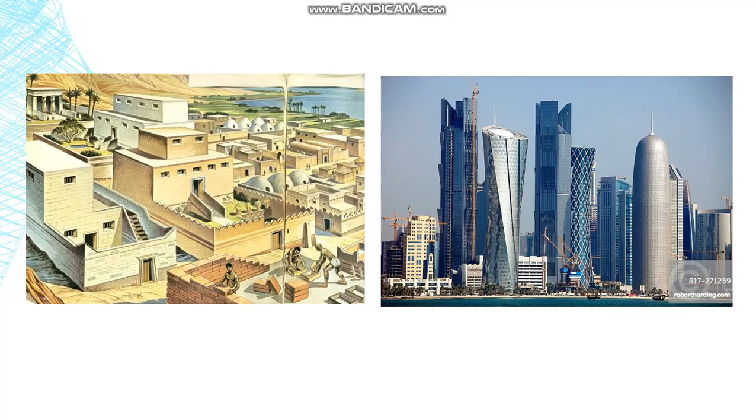Well, I would like to start by introducing how people used to build their structures in the past. They used to consist of 1 to 3 floors, but now we are building much larger and taller buildings that are capable of withstanding more people, more loads, and so on. All of that happened because of this amazing material, which is concrete. Well, you may ask, what's concrete? Well, it's an ancient material that's basically made up of aggregate bonded by cement.

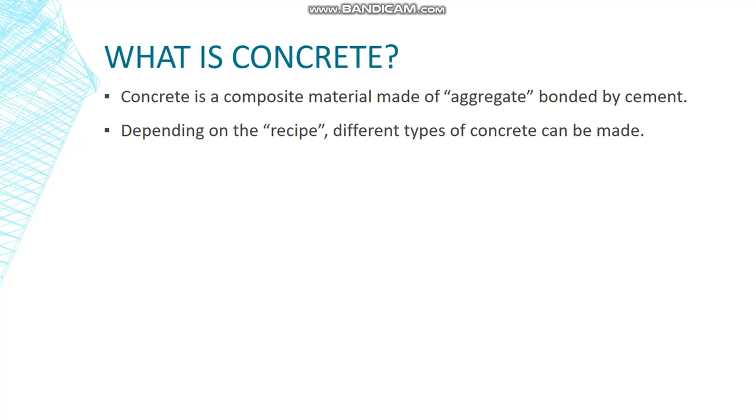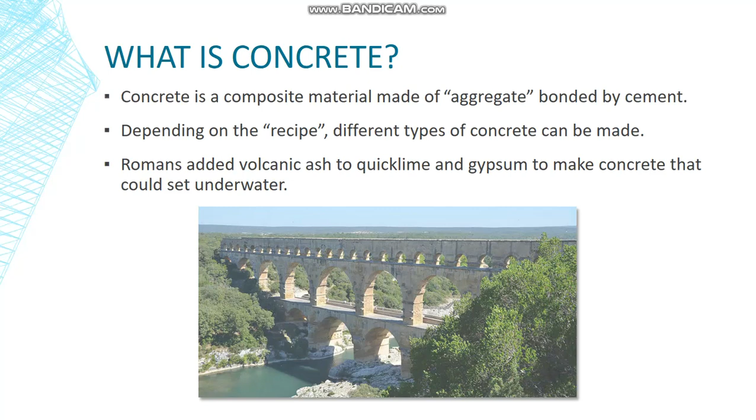And since changing the recipe will change the properties, we can work on this field to improve our concrete for our applications. For example, the Romans used volcanic ash to add some more waterproof properties to the concrete for building bridges, water transporting systems, and so on. And the same applies for modern concrete. We're still using cement, sand or natural gravel and admixtures.

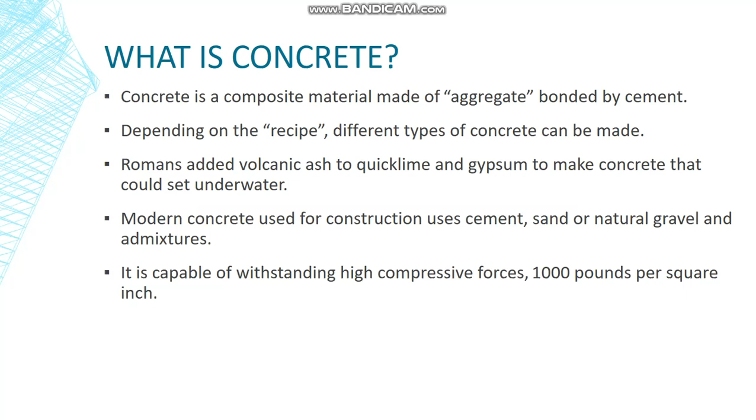And interestingly enough, this material is capable of withstanding up to 1,000 pounds per square inch of compressive stress, but not so much for tension. In fact, it's only about 5 to 10% of that value. Now let's have a look at the structure. We have the aggregate and the cement. When we apply the compressive force, the cement distributes the load within the material, and the aggregate is also contributing, which makes the material withstand a huge amount of load in compression.

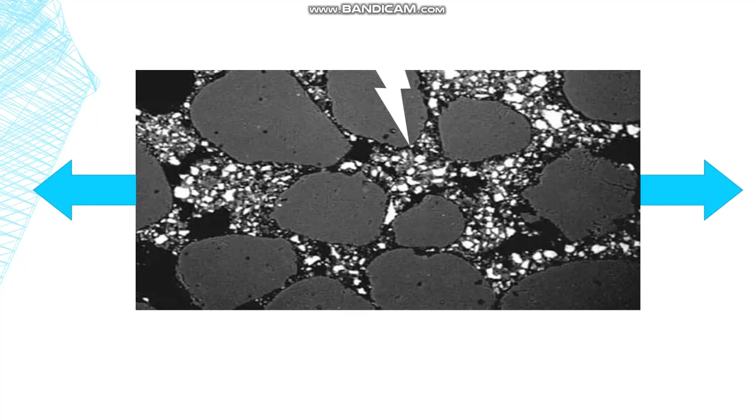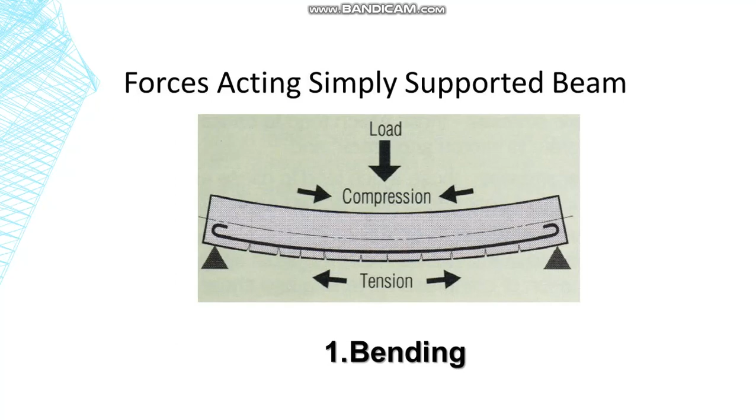But it's a completely different story when it comes to tension. When we apply tension, the aggregate is no longer contributing. It's all up to the cement to withstand that load. But since cement is not that strong, fracture will occur in the system. And here's the challenge. We are applying load to our structure, making it bend, and bending makes the material experience compression on one side, which we have no problem with, but tension on the other side, which makes the material fracture. And here's where bendable concrete comes into play.

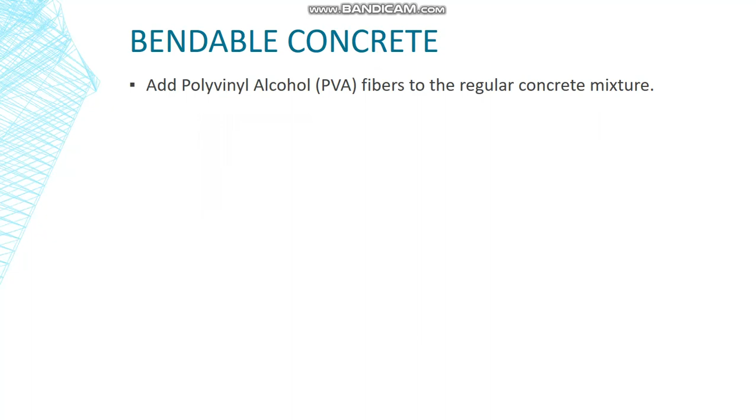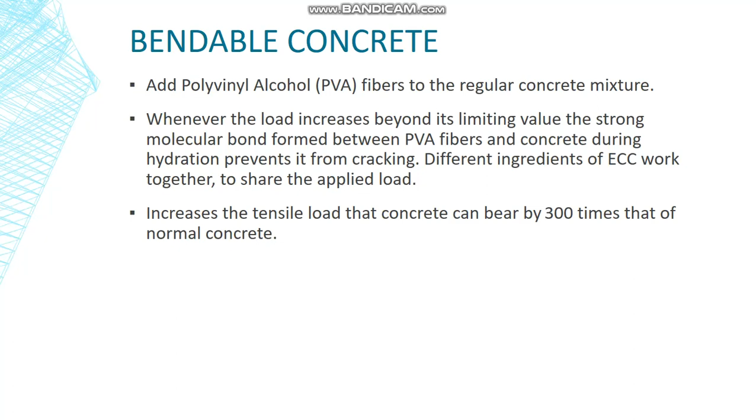We are capable of adding polyvinyl alcohol fibers, or PVA, and that allows us to build stronger concrete from the tensile perspective, where we are introducing fibers within the cement that ensure the presence of the bond within the cement to the aggregate, and that will distribute the load within the material. It works similar to how a tree's roots work in the soil. So by doing that, we are capable of building concrete that can withstand up to 300 times more tensile load than normal concrete.

And this is a huge advantage because now we are capable of building much stronger and more durable concrete. At the same time, this concrete requires less emission of CO2, and it's 20 to 40% lighter, which I personally believe is an amazing property because we are now capable of building structures stronger and larger while saving energy.

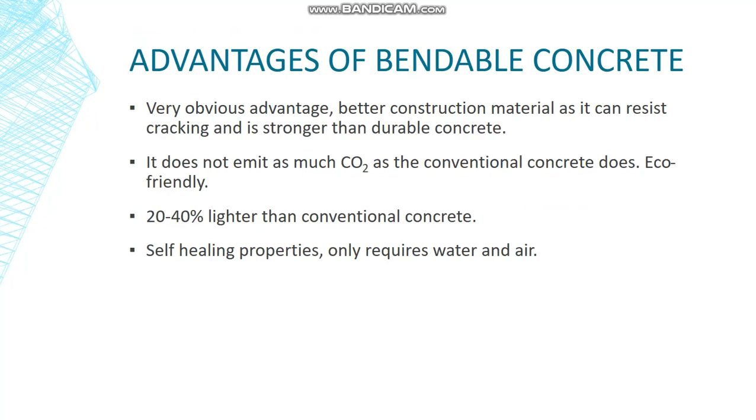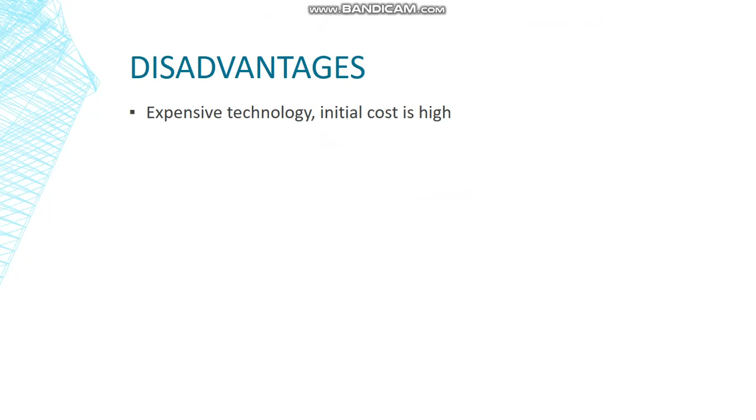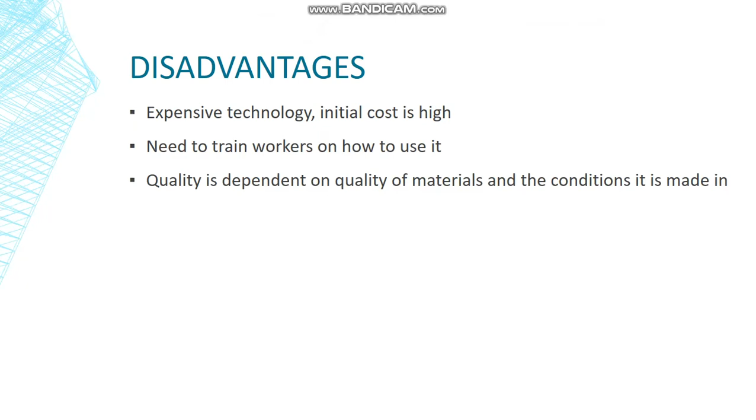And let's jump into the disadvantages. Of course, every new technology has some disadvantages. First, we start with the cost. It's an expensive technology and it requires high cost for the initial investment. It also requires workers to be trained on this new material, and the quality of this material depends heavily on the conditions it's made in, where it can have significantly varying properties.

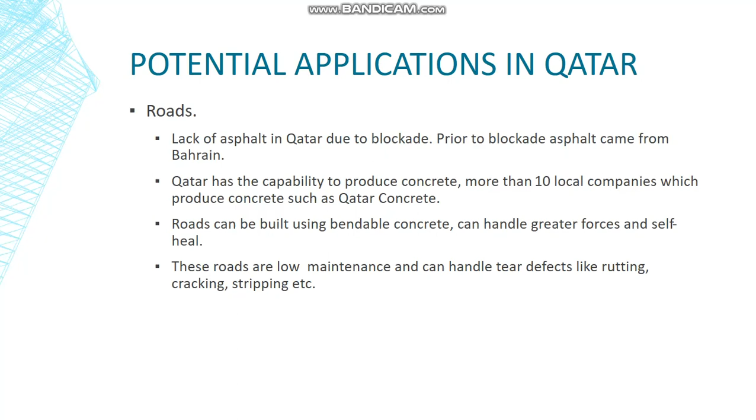How about the potential applications here in Qatar? Well, roads are a potential application because Qatar is capable of producing concrete; we have more than 10 local companies that produce concrete, such as Qatar Concrete, for example. Also, roads built from bendable concrete can handle greater force and can self-heal, so they require less maintenance and can last for a long period of time.

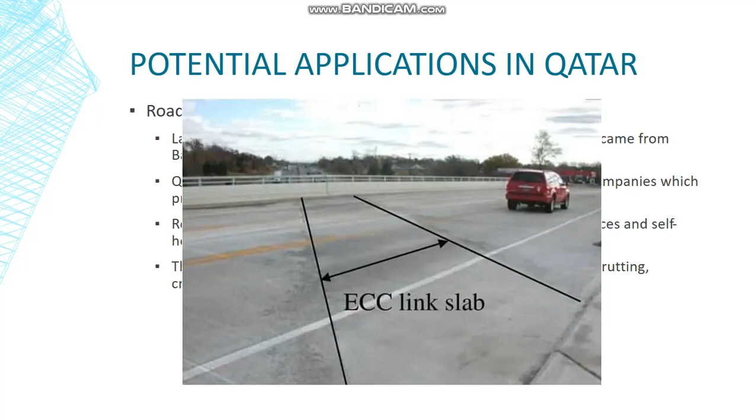And here we have a nice example where bendable concrete is used in this ECC link slab, where it can withstand the tensile stress and the compressive stress in this moving street where it opens and closes. Also, it requires less maintenance and can last for a long time.

Another potential application is generation of energy. By introducing polyvinylidene difluoride, or PVDF, it allows the material to generate electricity. This polymer acts similarly to a strain gauge, where it allows the production of a potential difference by applying varying strain. By introducing this material, we might be able to light the streets and the traffic lights with this energy generated by the concrete.

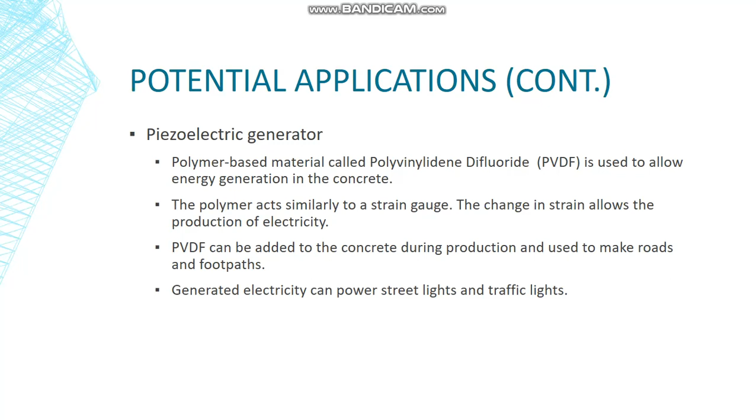So as you can see, we have huge applications and huge advantages when using this material. It allows us to build stronger, larger, lighter structures that require less maintenance, that can shape our humanity, that can shape our civilization in the future. So I hope the video helped you understand what bendable concrete is, and I hope you enjoyed the video.